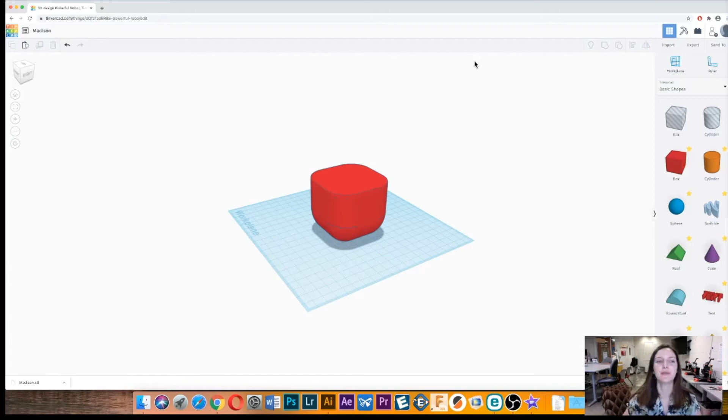All right, so we just finished our 3D model, and now we're going to bring that model into Slicer for Fusion 360. You will need to download this on your personal computer.

This is what it looks like, and a few things to orient you. So you can sign in and save these things to the cloud. I don't think that we need to sign in to do what we're doing, but it's up to you, and I think you will need to if you're going to be using Fusion 360.

So the first thing we'll do is come over here to import and get that STL. Here it is. This looks good.

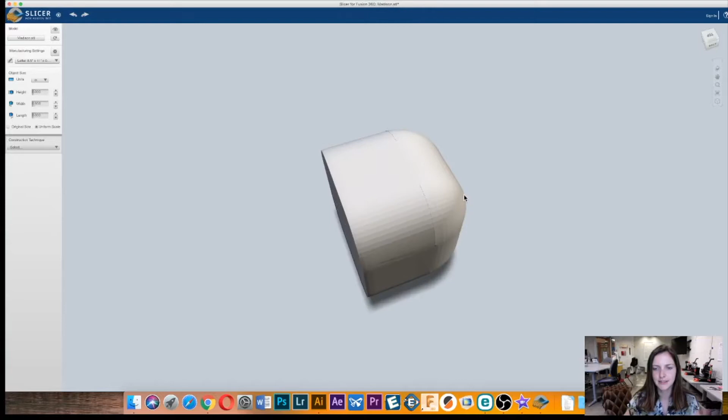To orient you on the right, this is the same kind of thing that we have in Tinkercad and other Autodesk softwares. We've got the home position that's going to bring us back to the original orientation. If we click on this, we can just use our mouse to change the orthographic perspective. This will pan, zooming in, zooming out. So those are kind of handy.

On the left, we have some really important things we need to cover now. So this is my model. These are our manufacturing settings, and we need to put in the correct width and height of our material, but even more importantly, we need to put in the correct thickness of our material.

So let's come over here and add a new material. This new material is going to be called cardboard. And the cardboard I ordered for this class specifically is 26 inches by 38 inches, which will be important later on.

And the next thing it wants to know after we put this in is the thickness. So I really suggest getting the cardboard that you're going to use, like even maybe the exact piece of cardboard that you're going to use, and you're going to use the digital calipers and measure the thickness. It looks like we're in inches, and you can change those units at the top.

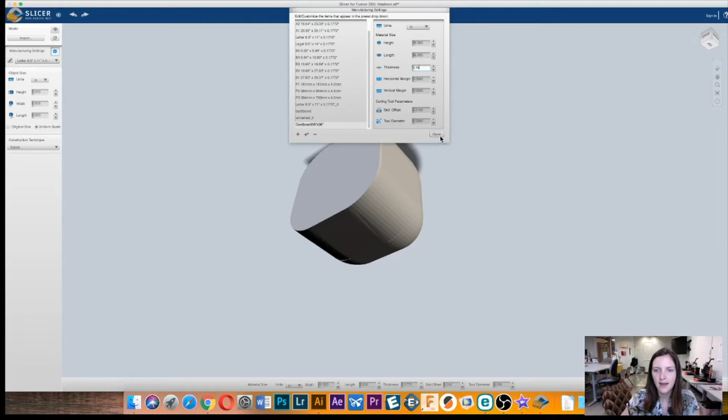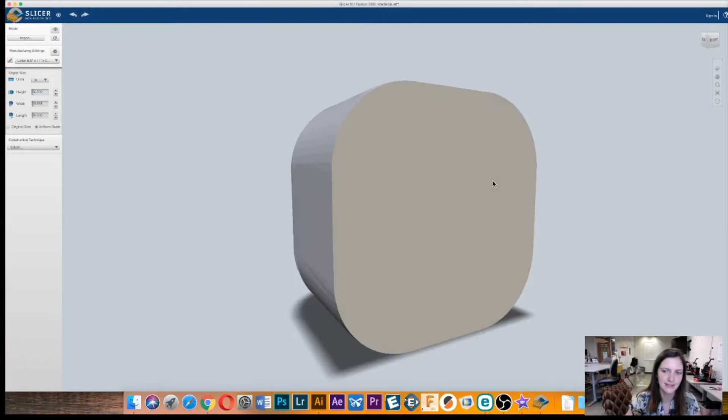And done. Cool. All right. So like I said, on the longest axes, this needs to measure a minimum of 24 inches. So the longest axis here is this 8. So all I do is just click 24, type in 24.

And now this is the size that's required for the ultimate week. So we're not going to be making this large this week. That's for next week, but just know that's how you would do it. So this week we can do like 7 inches.

And then we're going to choose a construction technique. So we're going to be doing interlocked slices.

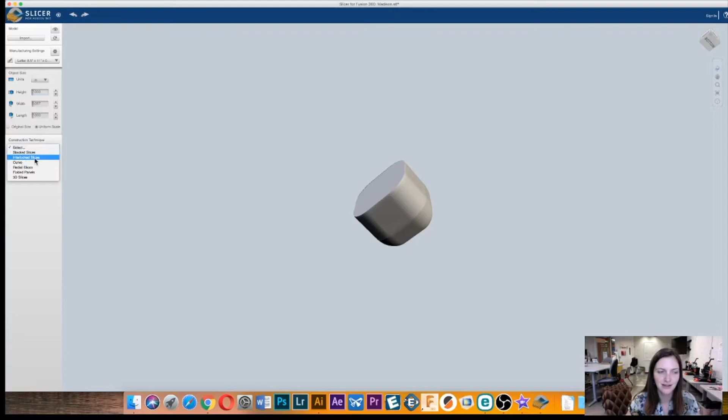And here's that. Okay, so now on the left, we have some more stuff. On the right, we have all of our parts. And it's saying that we would need 16 or 18 sheets, and we have 20 parts. And then if you did have model issues, which at some point you probably will, those would pop up here, and you could see why they're an issue.

And then on the left, we've got method by count. So we can change the number of slices on each axis by playing around with these things. But we're going to try and just stick with a minimum of 12 total slices.

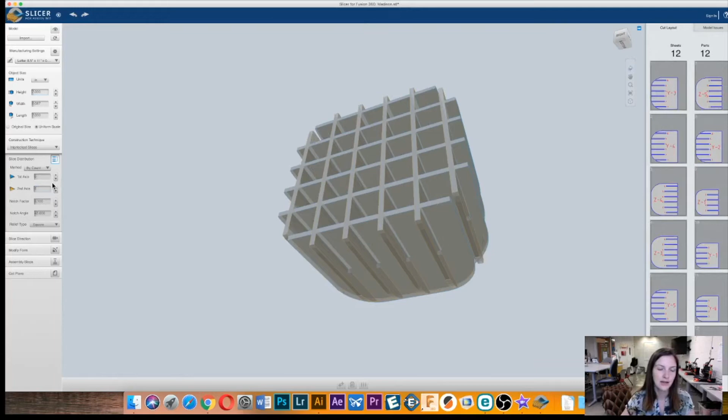So that would mean I could take this down to 6, and I can take this one down to 6. Now you can do more, but you can't really do less. We need to do about 12, but you can do more if you want to. I would really just stick with 6 on each axis, but it's up to you. And if you have questions or there's something you want to make and you don't need that many slices, let me know and we can maybe talk about it.

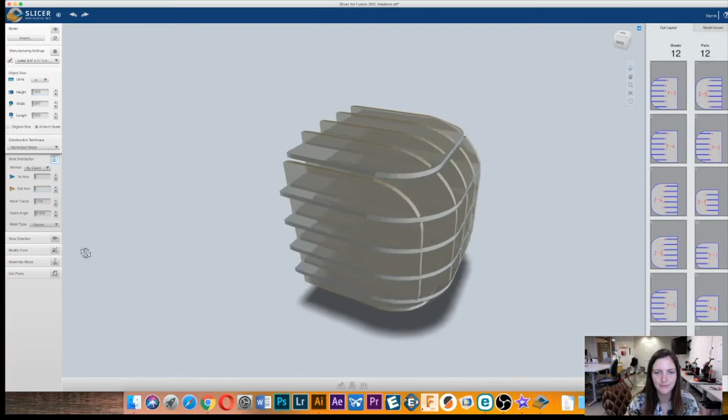All right, so this is what this looks like now. And I want my model to not be so vertical, just up and down. I kind of want it to be more dynamic and going at an angle. So I'm going to go to slice direction, and I'm going to see if I can move some of this around.

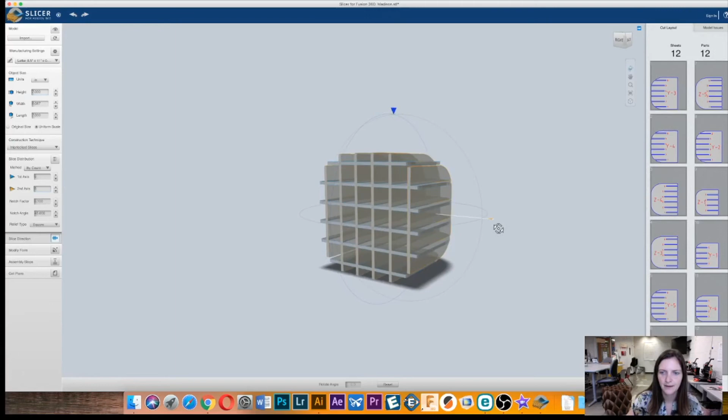So it looks like you have to get out of this mode to actually do this step. This is how we can begin to change the angles of things. I want to change it on this side too.

Maybe something like that. You can see this red popping up, and that is telling us that there are slices with errors, and you can click on them individually and see what's going on. And this is telling us the parts are too large for material, and that would be a problem, right?

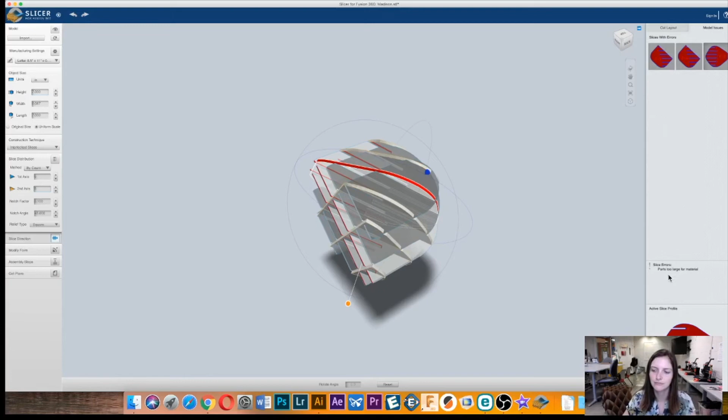Sometimes this software isn't quite right and your parts are not actually too large for the material. This software doesn't do nesting very well, so it could fit. You would just have to reorient it in Illustrator, which we're already going to be doing a lot of.

So this is kind of what I want. I think it looks really cool on the bottom and on the top. So I'm gonna go with this.

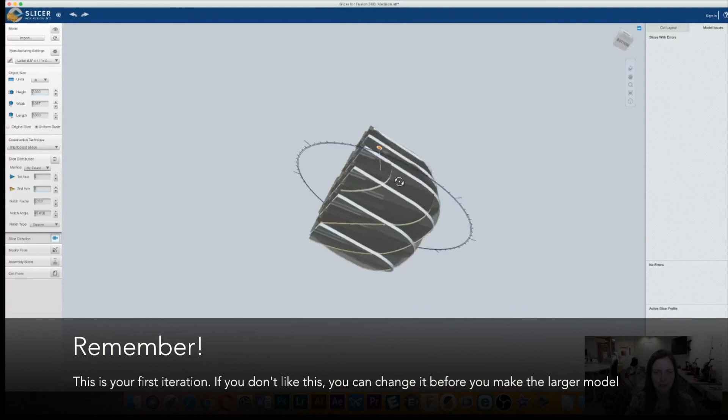Let's say you 3D model something and it's not working in here. You're probably gonna need to remodel something, so not every object is good for this technique. You may have to do some back and forth between the two softwares to get the slices you want, the object you want, those kinds of things.

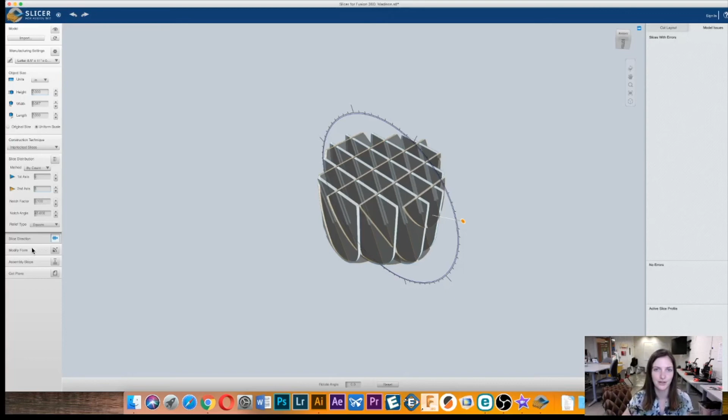There's also this right here, modify form. So let's say I'm looking at this slice right here on the end, and I'm thinking that's gonna potentially fall off, or it's kind of small and I don't need it, then I could just click and delete it. So it'll let you, or I can move it in to make it bigger. I don't want that because I really like this geometric kind of grid going on right here.

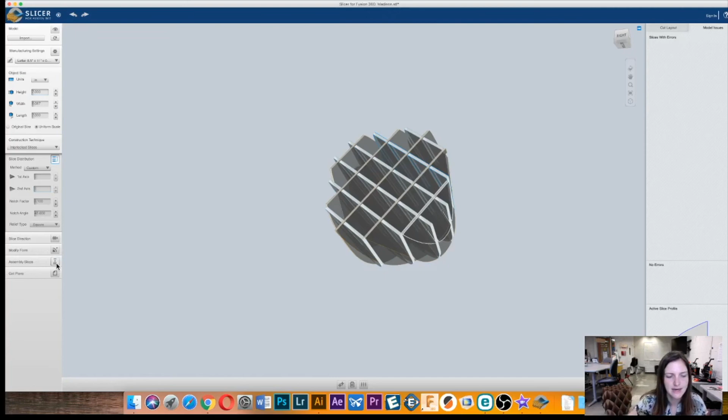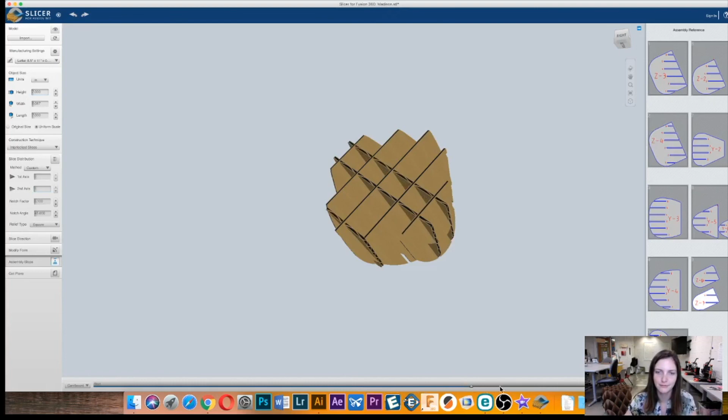So then the next thing that we can see is the assembly steps. You want to make sure you're saving this. So maybe you do need to sign into Fusion 360 because I don't need the instructions to assemble it, but I think you may get frustrated without these. I mean, it's okay to get frustrated, so maybe don't have them, but this is like a puzzle.

Once you cut it, you're gonna need to figure out how it goes together. And if you don't have this, it's maybe gonna be harder, which could be fun or not fun for you. So save this. Now we're gonna go to Get Plans.

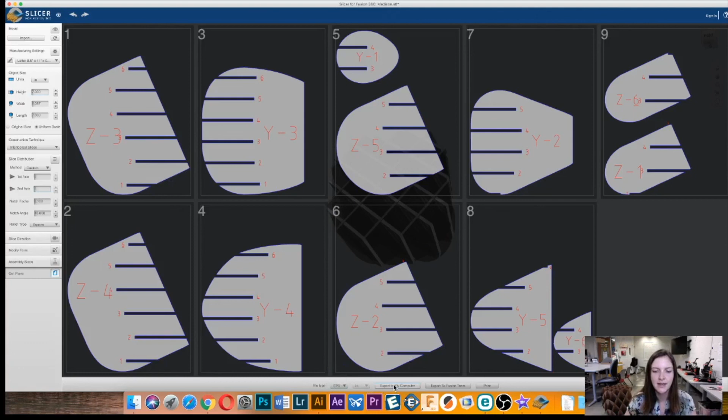Here it is. Okay, so file type, EPS. That's fine. We're gonna export to my computer. And I'm gonna call it Madison Side Table Mini, and save it to downloads. Press save.